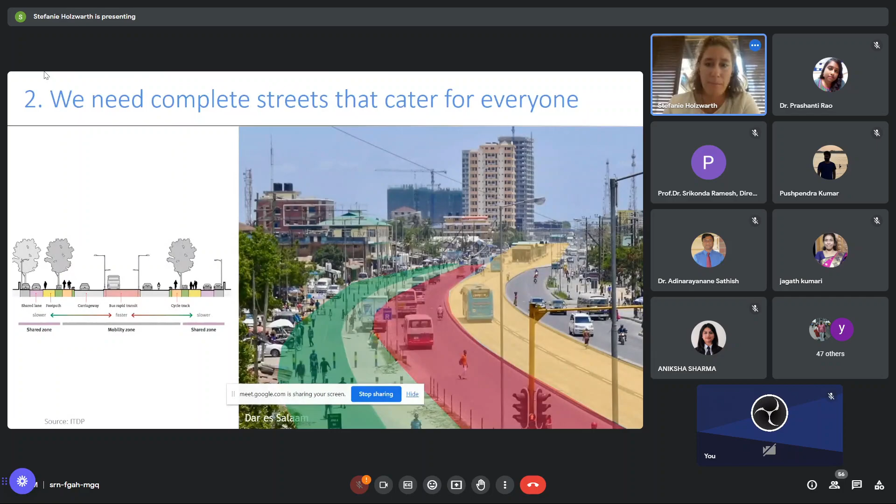The example here that you can see is from Dar es Salaam in Tanzania, where we have assisted the city in the implementation of a BRT, of a bus rapid transit system.

We also have to design for efficiency. Space is very limited on many of the streets that we're working with. So it's really about looking for opportunities, looking for transport modes that would be using the space most efficiently.

And that really puts a big focus on public transport systems, as you can see, that have a much higher carrying capacity in terms of people per direction as compared to, for example, mixed traffic infrastructure for only cars. And the decision in each city really needs to be based on the transport demand, on the existing right of way. So there's no right or wrong solution, but I think the focus on public transport becomes very evident looking at this graphic here.

We also have to shift our mindset and need to strengthen public transport as the backbone of all mobility services. I think that's really a shift in the way that we have to think about our cities and really put a lot of emphasis on this idea of multimodal transport that puts public transport in the center, integrated with walking, cycling, on-demand services, new mobility modes, and so on. And then also, again, look at how to redistribute the street space accordingly.

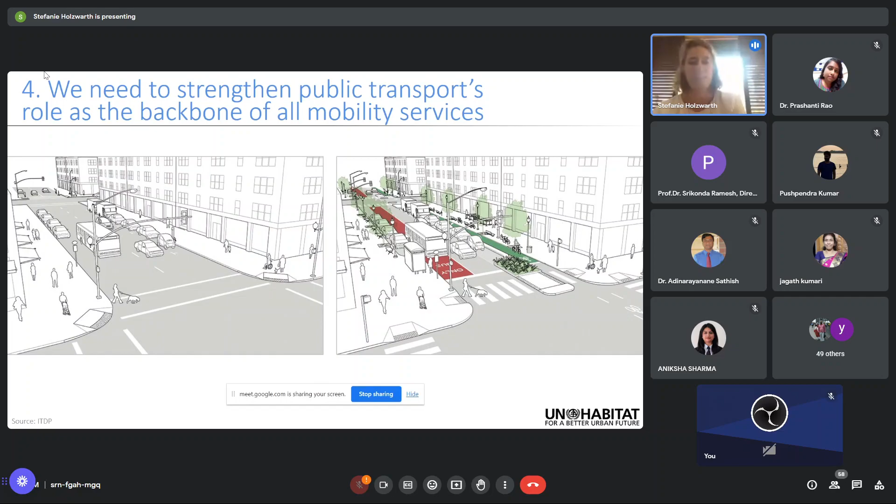We need to guarantee financial incentives and a policy and regulatory framework for sustainable mobility. And that, for example, would mean that governments would need to invest more and more into public transport systems, the operations, the infrastructure, the maintenance of them, or also provide incentives, for example, for the shift to electrification.

We need to establish institutional frameworks with fully fledged institutions. That is very important, especially when we look at mobility from a metropolitan perspective. We have to work together as partners, and certain institutions need to be set up that are really bringing together the partners and coordinating this multimodality of the public transport systems in the metropolitan context of cities.

We also need to encourage an accelerated uptake of innovation and additional investments in clean technologies. Here you can actually see an example from Kochi in India, where we have supported the introduction of electric auto rickshaws. And the business model behind that was very interesting, where UN Habitat catered for the additional funding as compared to conventional auto rickshaws. So it was a very interesting business model behind that project.

We also have to focus on another sector, which is the energy sector, and really try to promote the shift towards renewable energy, because only then electrification makes sense if the energy that is pulled into is actually clean.

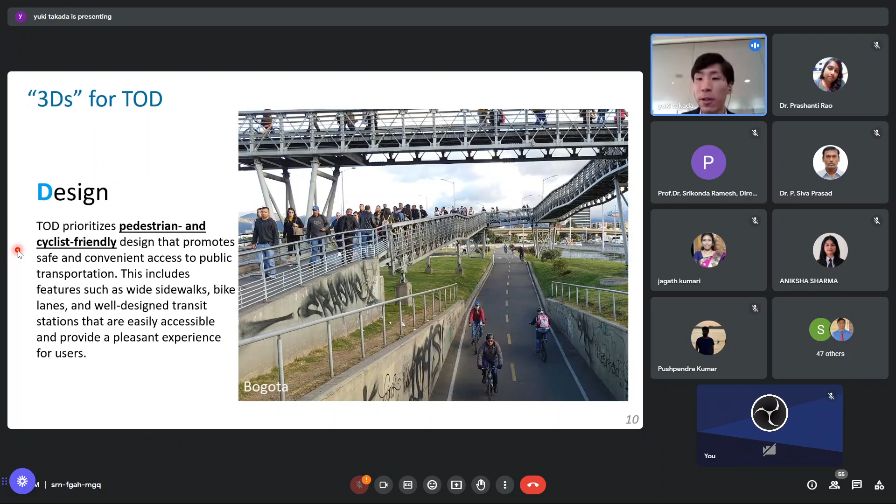Coming back to the first D, density, how do we control the density? I think we are familiar with this, but I'm going to introduce you to three indices for controlling density, which are floor area ratio (FAR), building coverage ratio (BCR), and green area ratio (GAR).

FAR is the total floor area divided by site area, which regulates the density of the city or encourages efficient land use. BCR is the building area divided by site area, and it ensures enough space for other uses such as public spaces and access paths.

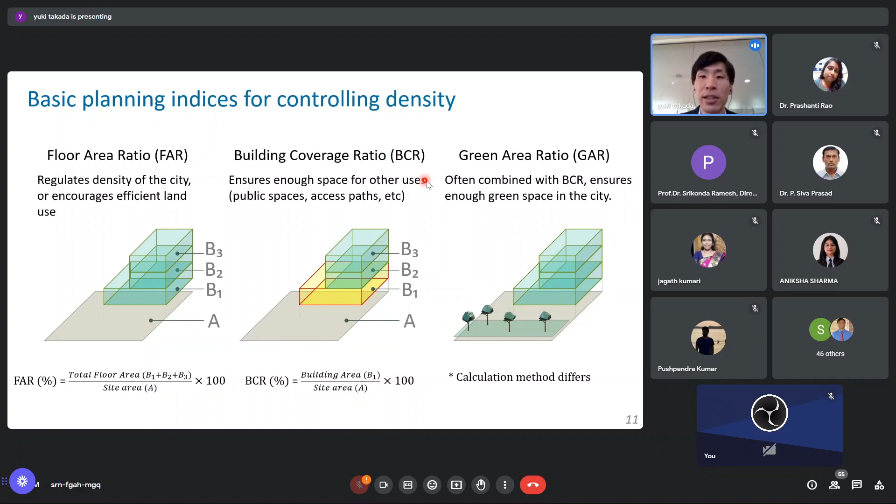Green area ratio - there are lots of ways cities apply to calculate this, but they are often combined with BCR to ensure there is enough green space in the city.

The second D, diversity - the key word is mixed use development. There are three elements for mixed use: one is blending multiple uses such as residential, retail, entertainment, office, hotel, and public. The second is physically and functionally integrating those uses. And three, most importantly, creating a walkable community with good pedestrian connections.

We often overlook or forget about this third one. It is really important to have this, as well as having a mixed usage of land. It is really important to have it in very close proximity, at a human scale.

So there are two ways you can do mixed use. One is vertical, where you can have the lower floors as retail shops and the upper floors as residential use. Or you can have horizontal mixed use, which provides for a variety of complementary and integrated uses that are walkable within a neighborhood.

So I'm going to talk about some examples from Bangkok. I want to talk about how they zone and create the zoning and density regulations.

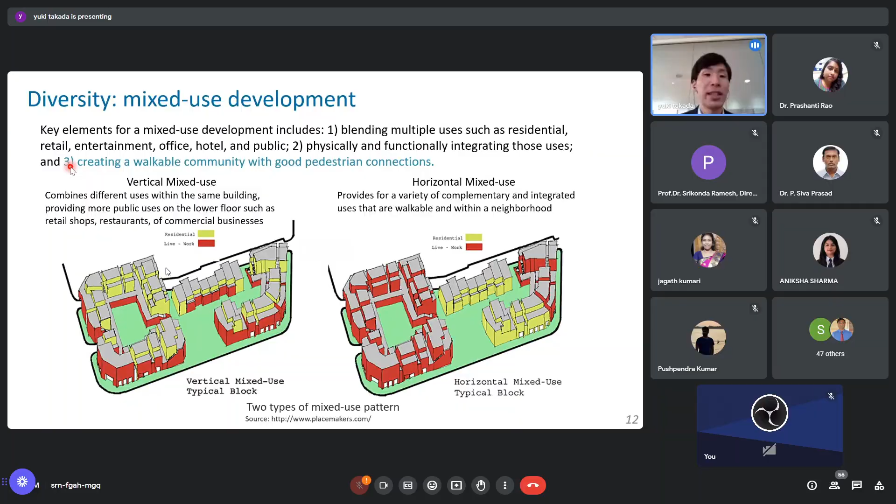The development size, or bulk control, is done using 5 parameters, which are floor area ratio, open space ratio, minimum and maximum lot size, maximum heights, and building setbacks.

If we take an example for low density residential zone, colored in yellow, typically the FAR for this kind of land use is up to 250%, while the open space ratio has to be over 12.5%. On the other hand, high density residential area, shown in brown, the FAR can go up to 600%, whereas the open space ratio has to be above 5%.

Bangkok has provisions to promote TOD by zoning, and there are specific land use codes assigned for areas adjacent to public transportation to promote TOD.

So in a regular brown zone, meaning high density residence, FAR is up to 600%, but where it is adjacent to public transportation, it can go up to 700%. So the difference is 100%.

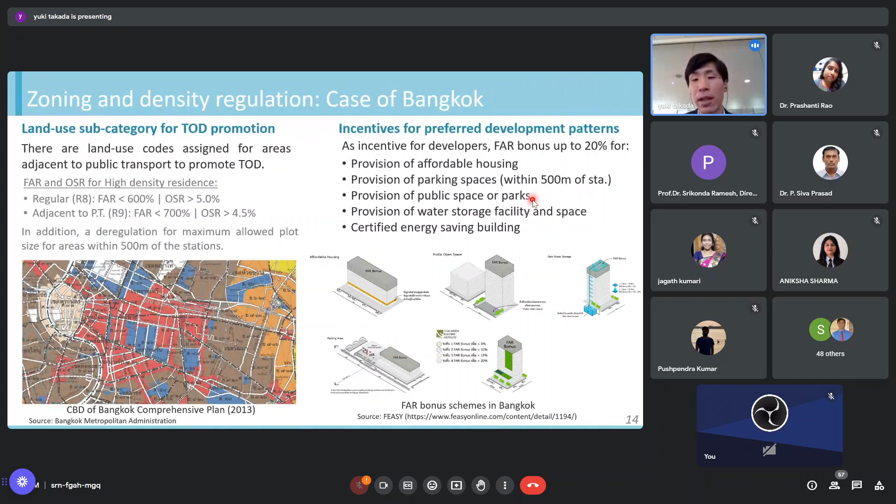Going back to the third D, designing for walkable and cycling areas, at the neighborhood level it is important that plots are designed at human scale to ensure a network of walking and cycling routes. City blocks should be 1 hectare or less, with the longest dimension no more than 150 meters. It's good to break up large blocks to create a walkable neighborhood.

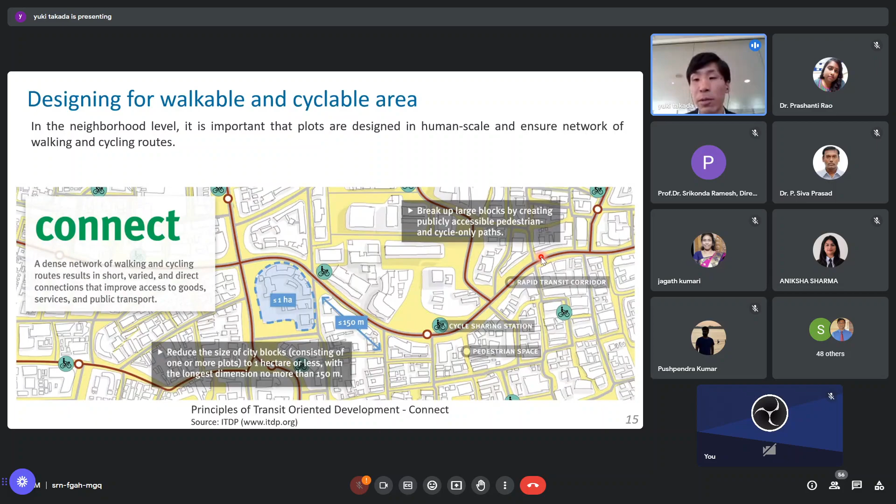I'm going to illustrate this with the case of Barcelona, which adopts a grid style city system. They plan a network of green streets and green squares inside so-called superblocks, which typically consist of small roads and streets for pedestrians and cyclists, with cars, vans and scooters not allowed to enter these areas, having to go around the perimeter roads instead. They have piloted this for some blocks and are in the process of expanding it to the whole city.

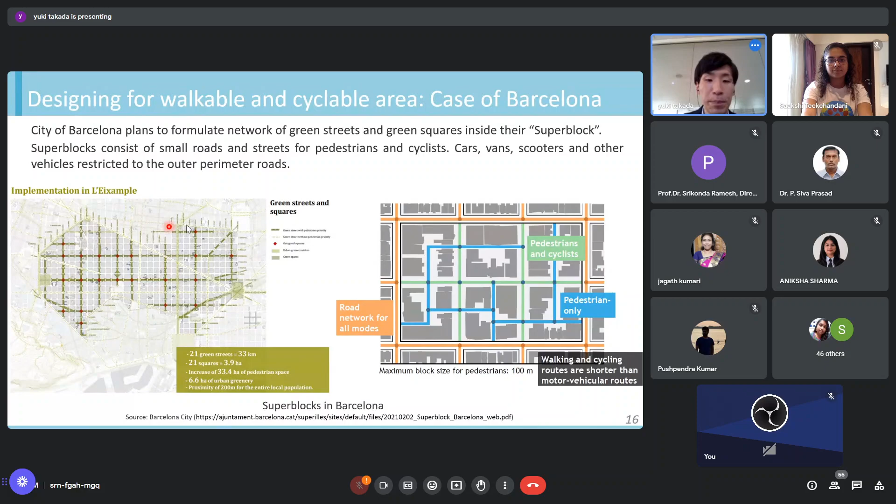Another example is the case of Ahmedabad CBD. The CBD used to have streets unfriendly for pedestrians because the blocks were quite large. In the process of development, they proposed a revision of the development plan, dividing the land plots into smaller sizes to provide a walkable, pedestrian-friendly neighborhood, reducing the average block perimeter from 750 meters to 400 meters, with intersections every 100 to 150 meters.

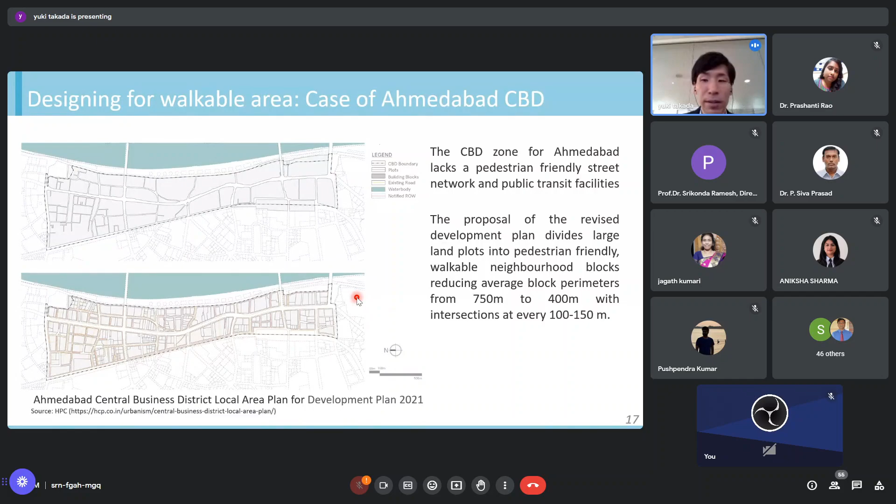For designing accessible streets at the street level, it is important that infrastructure and street furniture provide comfortable and easy universal access to public transportation.

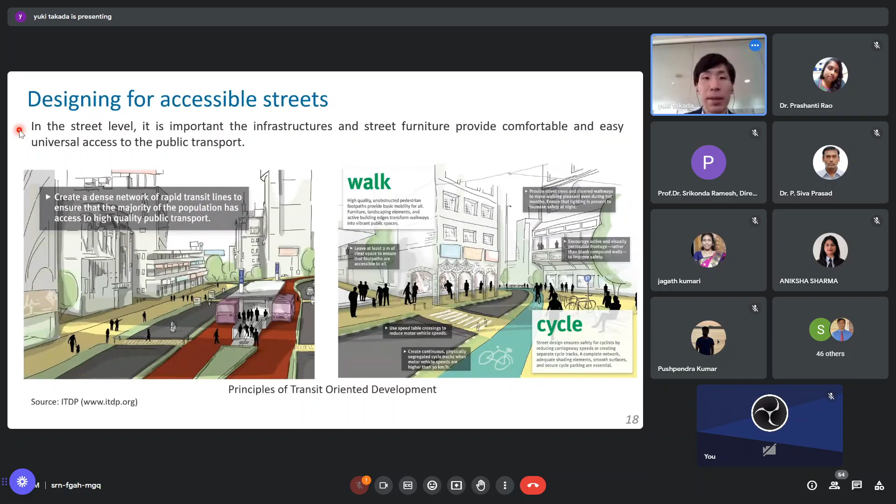I'm going to introduce a case in Dar es Salaam, which did a good job when building the BRT system. They built curb ramps on sidewalks and station platforms so it's easy to access for everyone, even people in wheelchairs. They also made elevated pedestrian crossings at every station so cars have to slow down when entering the station area.

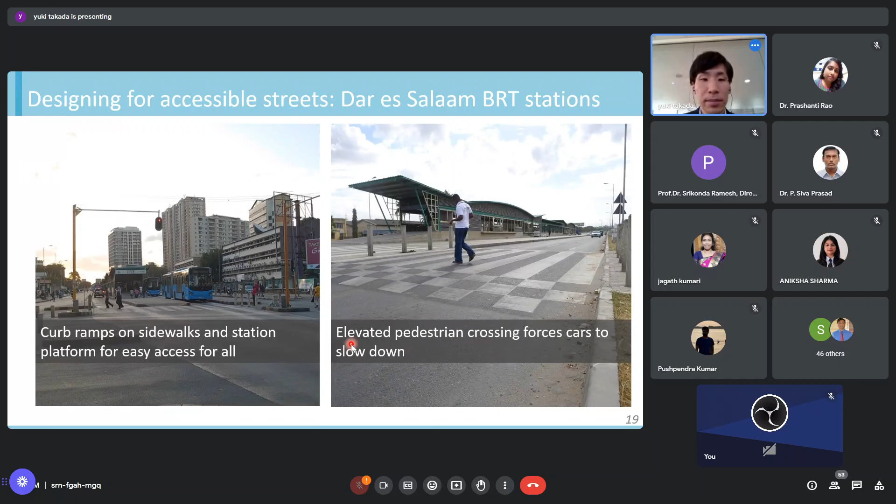Now I'll talk about the spatial scale of TOD planning. TOD spatial planning ranges from macro scale to micro scale. First, at the macro scale, there's the city level, which involves integration of land uses with the transit system and deciding where is the growth center and where is a protected area.

Then there's the corridor level plan, which ensures that development at one station complements development at other stations, resulting in a connected network of transit-oriented places. And there's the station area level, encompassing the distance within a 5 to 10 minute walk to ensure safe access to the station for all users.

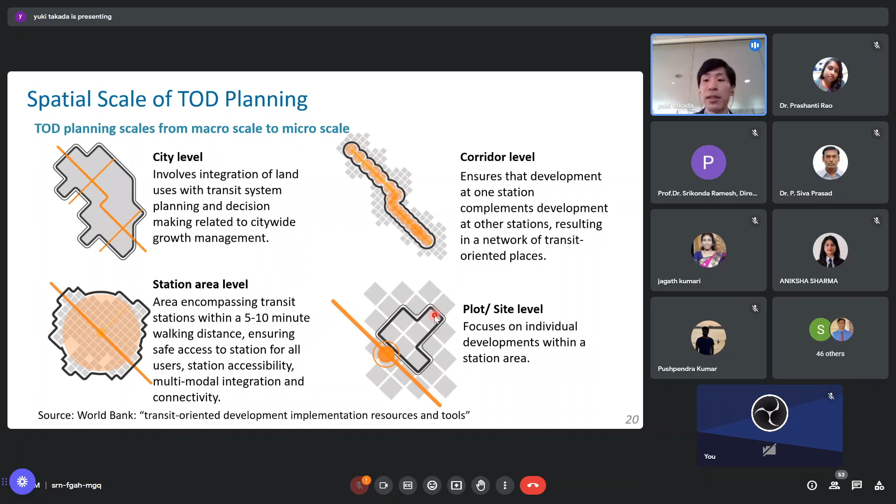And there's the micro scale, the neighborhood or plot size level, focusing on individual developments within a station area. Going back to Ahmedabad, they have a city plan defining growth centers and urban axes, with a strategy to integrate land use and transportation. There's a corridor level plan forming the transit-oriented zone, called TOZ, defining development patterns along the corridor based on each area's characteristics. And there's a neighborhood plan establishing the development pattern for each land plot. It's really important that these plans are consistent and don't contradict each other.

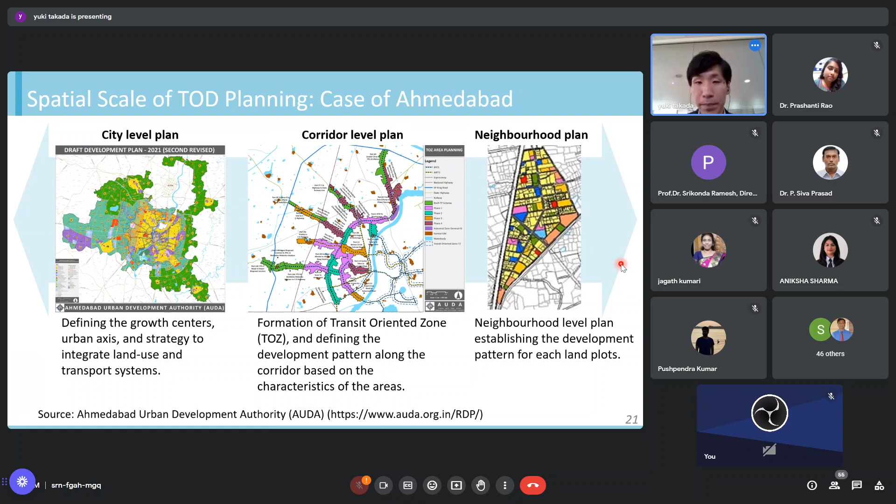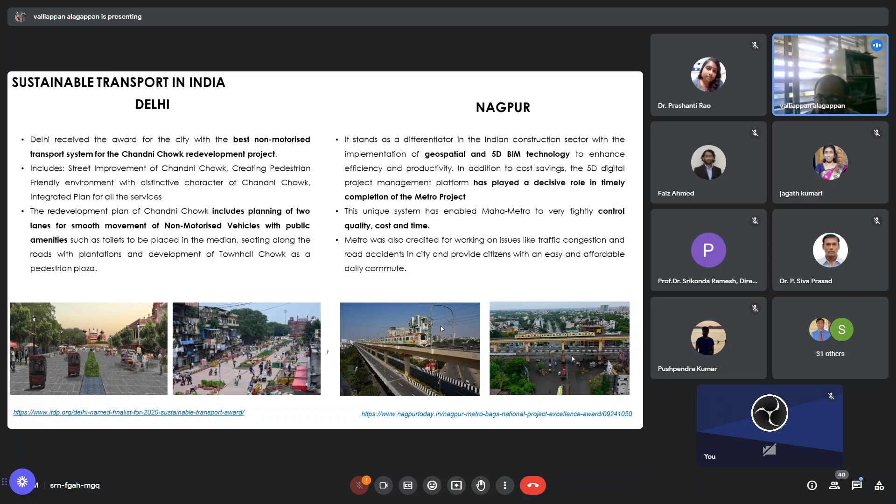In Nagpur, they introduced geospatial and 5D BIM technology and completed the project within time. They completed this Maha Metro with tightly controlled quality, cost, and time. The Metro was also credited for working on issues like traffic congestion and road accidents in the city, and providing citizens with an easy and affordable daily commute.

We will now look into some sustainable development projects in India related to e-mobility, the non-motorized transport project in Visakhapatnam, and mass rapid transportation systems by the Indian government.

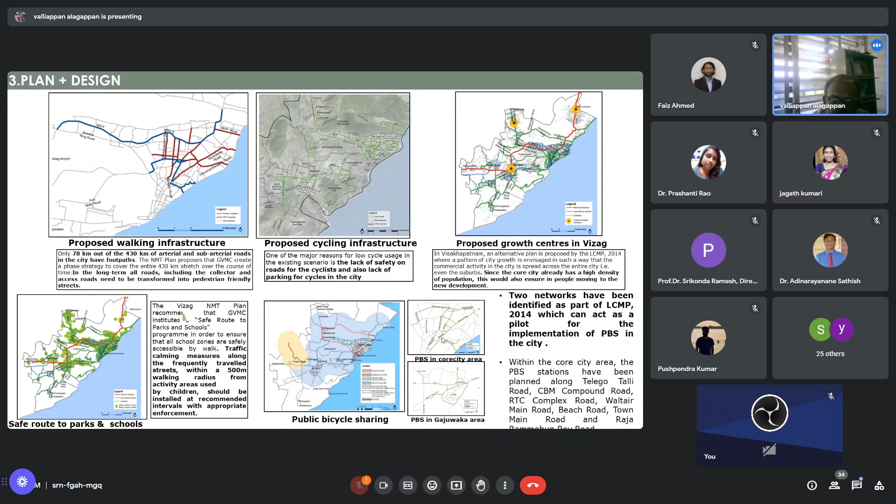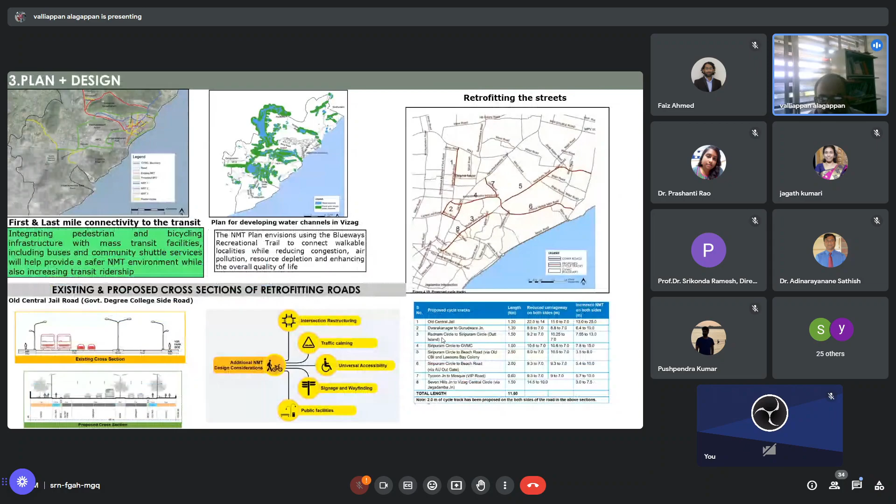GVMC through their budget is trying to invest 5.5 crores, and then 10 crores has to be included for the PBS scheme as well, totaling 11.6. They have taken as a pilot project 11.6 kilometers, and they want to implement the NMT infrastructure as well as the public bicycle sharing scheme.

The total estimated project cost comes to 5 crores from the municipal corporation and 10 crores from investors. So this is the bicycle project. They were looking into budget allocations and alternate financing options.

These are options not yet implemented but being considered, like polluter pay principles, private vehicle taxation, state transport duties, revenue reallocation, parking fee increases, and maximum parking norms. They are also looking for unconventional financing sources like various transport charges, allocating municipal budget for NMT infrastructure implementation, integrating advertisement revenue for funding NMT infrastructure, and establishing an NMT fund. So there are other ways also they are looking for funding for this project.

Along with the metro, in Visakhapatnam, NMT projects can be bundled with the metro project, such as developing a 30-kilometer feeder route network with provision for walk, cycle, auto rickshaw buses and other street amenities, and implementing the public bicycle sharing scheme.

Implementation is the fifth aspect of this five-stage process: involving the stakeholders. So what are the roles of each stakeholder? Politicians for building commitment and motivating the society, and then Visakhapatnam Urban Transport Company.

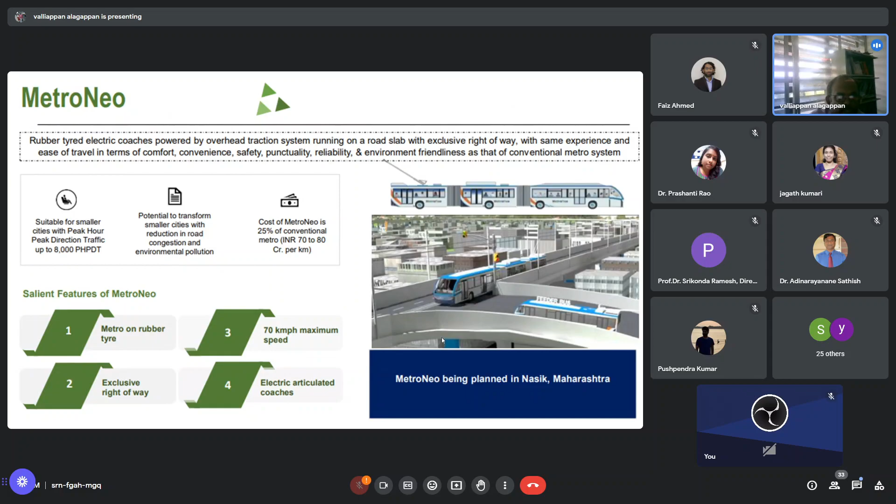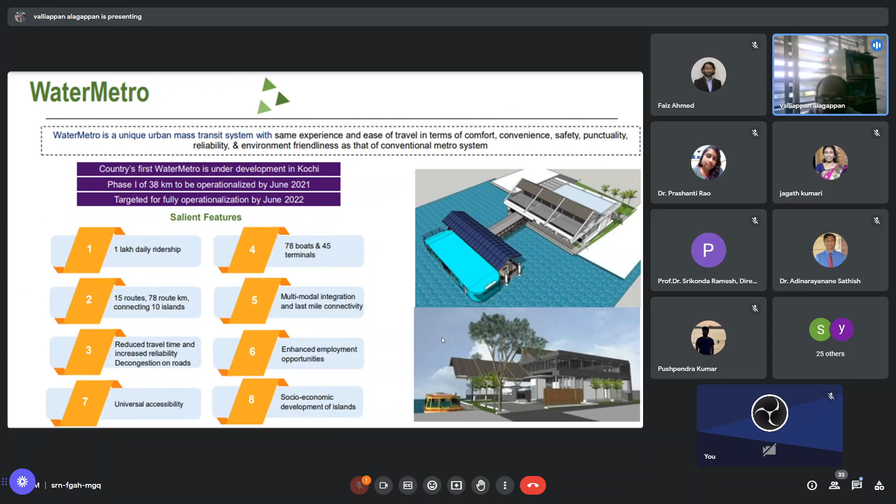Way forward: traditional urban mobility policies are mainly focused on widening and construction of roads, flyovers, and underpasses to counter these externalities. Our policy framework to achieve sustainable transportation should acknowledge that transportation is a derived demand, and the need to travel can be reduced through compact city form and mixed communities. Critical emphasis on efficient non-motorized transport and affordable, accessible, and safe public transport systems has been proven as an effective solution to rising motorized two-wheeler traffic.